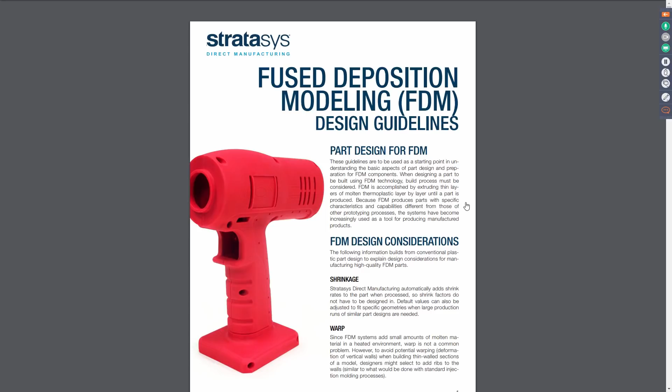Some basic general guidelines - we might offer more details as the challenge progresses, but this is a good starting point. Back to the landing page here, we also have a design guideline for those interested in designing parts for the ULTEM 1010 plastic material. This design guideline is provided by Stratasys, and it is not specific to ULTEM 1010. It's more general use case scenarios for FDM, but it does give you some good data. I will say right away, FDM ULTEM 1010 only prints in 0.010-inch slice height, and it has breakaway support.

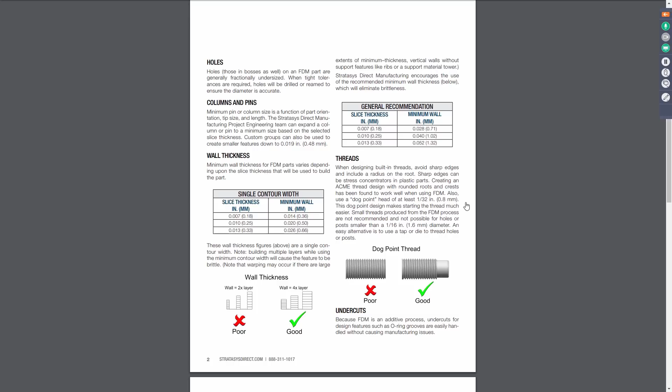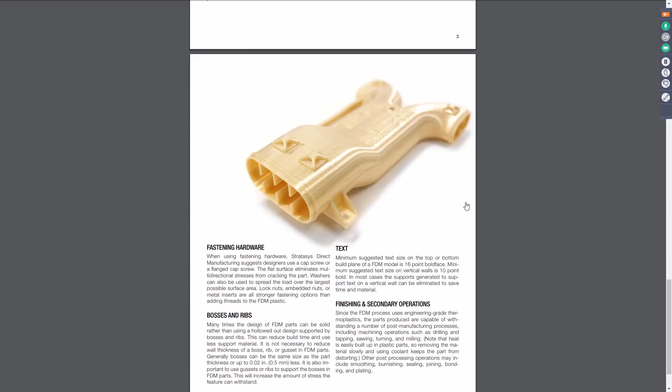FDM is a much older technology. There's a lot more info readily available on designing parts for FDM, so you should have no problem finding data, and you can always email me, treed@goengineer.com, if you have questions about that.

So the idea is that if you enter into the metal or the polymer category, the prize for the top 3 entries to each category is actually having your part printed and delivered to you. This is awesome - it's the most exciting thing about this challenge in my mind, and that is desktop metal - you can't get a part right now. This is the first time that the public has actually had a chance to design for the desktop metal system, and it's their first opportunity to really get a part in their hands, and that's really exciting.

Now, the grand prize, sponsored by Solid Thinking, is a 1-year license to Inspire Structures, and there are 3 Inspire plugins: motion, stamping, and casting. So as you start to use Inspire Unlimited and get hooked, you're going to have a chance to win a 1-year license, which is awesome. And I'm so happy that Solid Thinking was willing to front that.

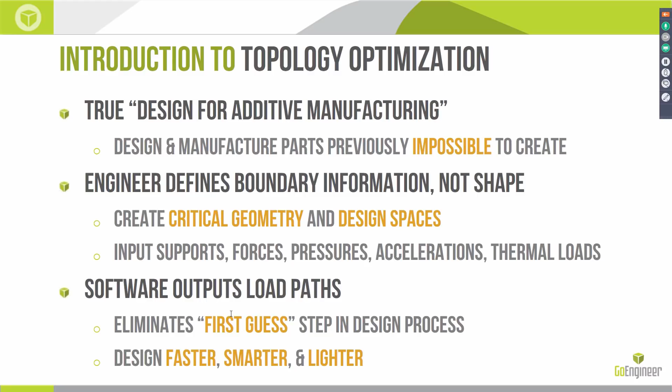And then these kind of nature-inspired algorithms whittle down the shape. They're showing you the load paths and eliminating that first guess that all designers and engineers have to take when they're confronted with a design question. And by eliminating that first guess and setting us down the correct path from the get-go, our design process is faster, it's smarter, we end up with lighter parts, or we end up with stronger parts for the same weight. Inspire specifically allows us to optimize our shapes for different characteristics.

We can optimize for the stiffest shape possible. We can target a certain mass. We can avoid resonant frequencies, and we can also target for wall thickness.

Another unique thing for Inspire is that we can create shape controls that allow us to not only use these topology optimization algorithms for 3D printing, which tend to deliver very organic shapes, but we can also guide our results to something that is usable for machining or casting or molding.

That's one of the best things about Inspire in my mind, and one of the roadblocks to using topology optimization in the past is that we would end up with shapes that weren't manufacturable. That's changing a little bit as 3D printing becomes more of a reality, but as it stands right now, most production parts are still being machined or cast or molded. And topology optimization in Inspire is going to still be applicable there.

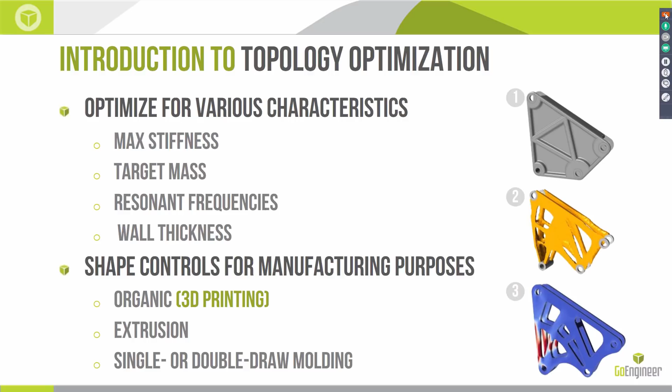Excellent. So after you've signed up for the design challenge, you'll be headed to the Solid Thinking Inspire Unlimited website. This is our main landing page for this. One of the things I want to point out right away is this resource section.

So immediately, if you want to get some training, click on Inspire Training. That's going to take you directly to a self-paced training program so you can walk through with the Inspire Unlimited platform. Once you've signed up, you'll get to this login page.

The reason you sign up again is we have it set up so you can actually just use your social media profiles to directly connect with Inspire Unlimited. So, for example, I can just use LinkedIn, and it's going to recognize me and open up Inspire Unlimited. If you don't have a social media profile, just fill out your email, and you'll get an email verification. Just accept that, and it will set up an account for you on Inspire Unlimited.

Now, once you're in the Inspire Unlimited platform, there's really two modes for Inspire Unlimited. The first is what we call viewing mode, where you're essentially just looking at models. And then the second mode would be actually editing mode, where you're creating and modifying designs.

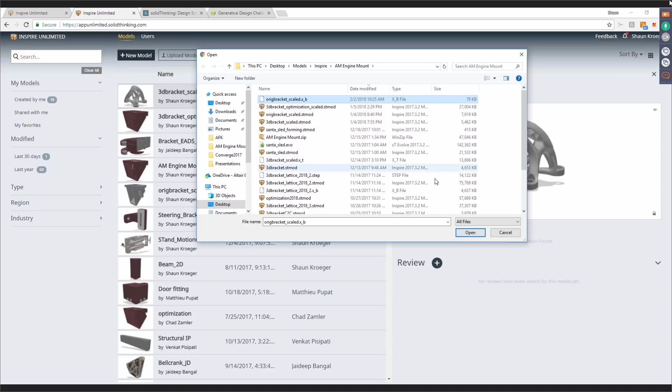So similar to the topology optimization workflow that you see in the desktop version, you can either start with a brand new model, so you want to start from scratch, or you can upload an existing design. So for example, say I want to just upload a Parasolid file. That's going to be processed in Inspire, and it'll tell me when that model is ready to view.

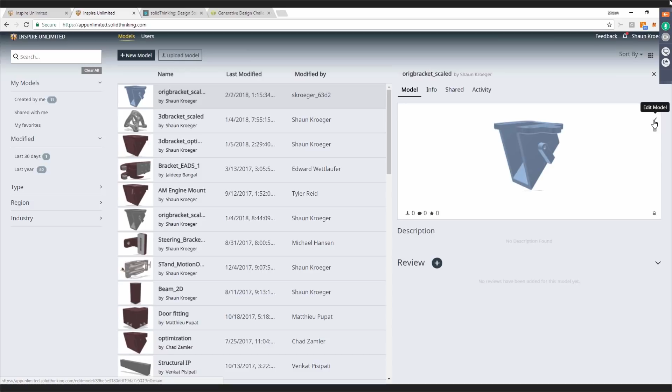And here I can see, okay, I just uploaded this bracket. And from here, you'll notice in the right-hand side, you can view that model, edit that model, or delete that model. So say you want to edit that, you're going to actually launch a full version of Inspire on the cloud. So here we can see that model is opened up inside of Inspire.

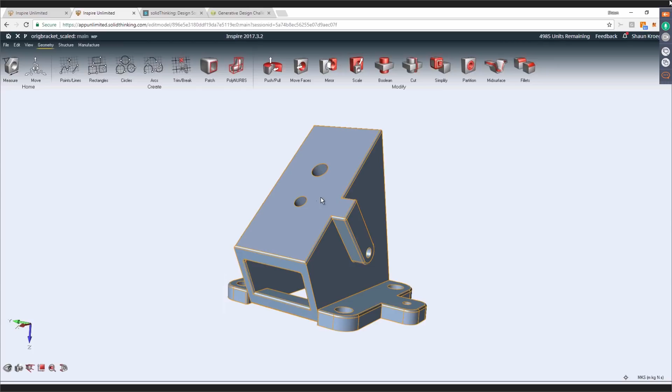The same mouse controls allow me to move things as I would on the desktop version. And I can use all the tools inside of Inspire to create things like packaging spaces. Say I want to simplify fillets, for example. Very easy to come in and directly inside of the interface, start simplifying your geometry to make it more suitable, give it more boundaries so that you can come up with a new optimized design.

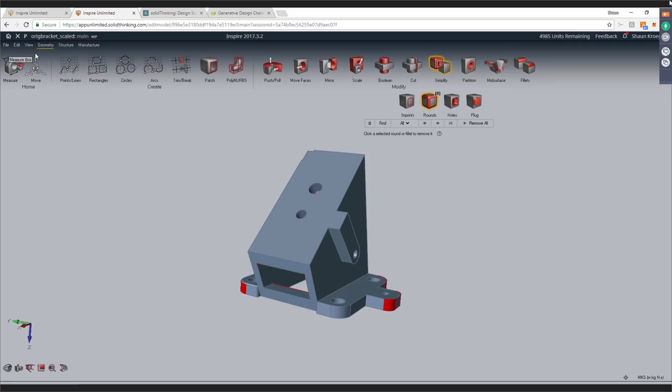I've already got one set up here, so I'm going to go ahead and leave this editing session and just open the one that I've already configured here, so you can kind of see what it looks like in the Inspire Unlimited interface.

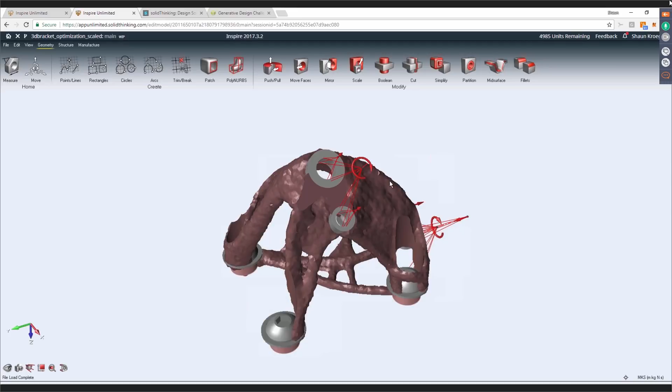Now, you'll notice this splash screen comes up, and normally it loads fairly quickly. If for some reason it's taking a long time, just be patient, as sometimes we have to spin up a new instance. So it could take up to 12 minutes to actually launch that editing session if you happen to be the person that comes on and enters and creates a new instance.

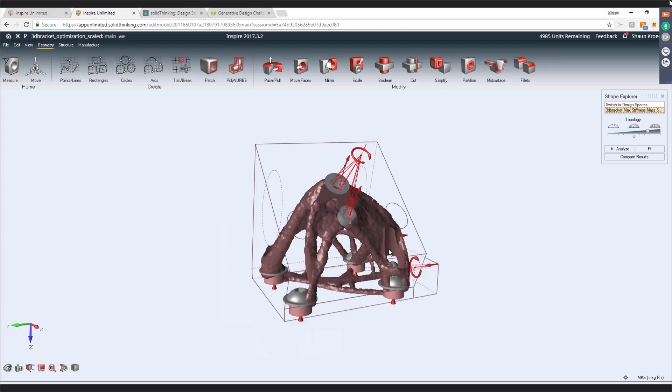So here I've taken the original bracket design, expanded that volume, and let Inspire use the loads and the forces that this bracket's going to see to create an optimized shape. And so from this shape, you can directly start creating geometry using things like PolyNURBS to simply wrap the geometry with smooth organic shapes.

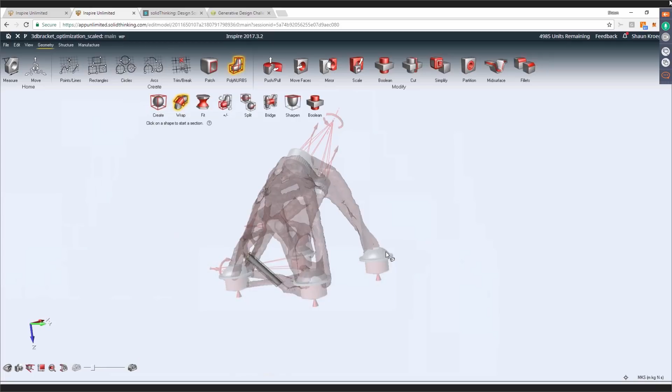Now, once you're happy with your design and you're ready to submit that to the judging panel, I want to point out here, you'll notice up at the top, I've got my account information.

So if I go to my account, go ahead and leave my editing session, and we've set up a team, right? So we've got the GoEngineer Generative Design Challenge team. And once you've logged into Inspire Unlimited, you'll be added to this team. And you can then, with that, share any of your models once you're ready.

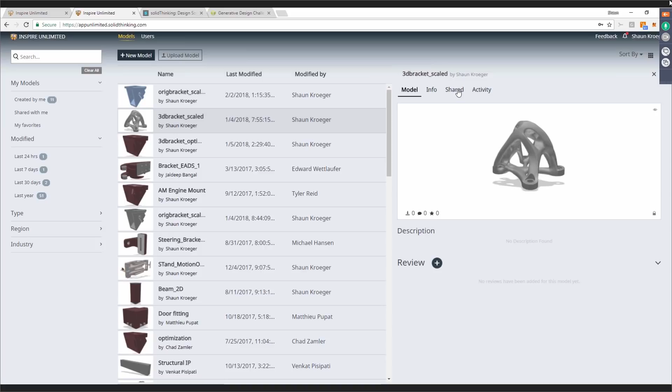So, say I wanted to take this final bracket design that I've created here and share that, you can come in and just share by user.

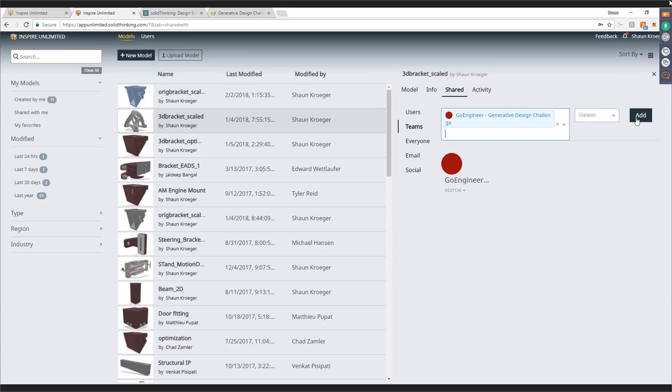So I could share this, say, with Tyler, and I can make Tyler either a viewer, an editor, or an owner. For final judging, you want to make Tyler, myself, and Megan an editor so that we can actually download and look at the model in detail. If you want to just let other people look at your design without being able to change it at all, you could share it with the whole team. So you could say, I want to share this with the GoEngineer Generative Design Challenge team, and let them view it. This adds permissions to your designs to let others look at it.

Also, if you want to ask questions, you can always use the Inspire Unlimited platform to provide feedback. This feedback is going to send your questions directly to the Inspire Unlimited development team.

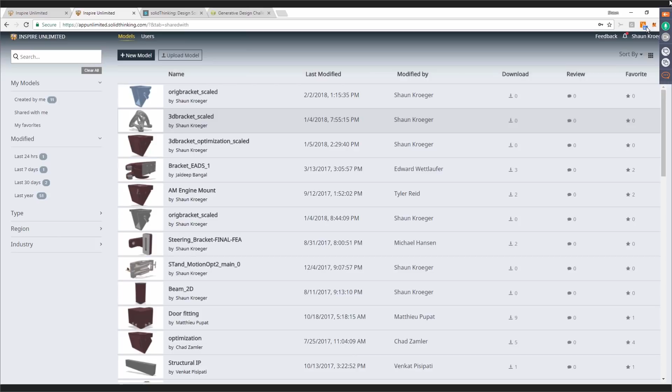Or you can use messaging capabilities in here as well. So if I come back to messages, for example, I can send a message directly to Tyler: check my model out. And then that's going to go directly to Tyler. So this is also a platform that allows you to quickly collaborate, not only with the judges, but with others if you wanted to work together on a design.

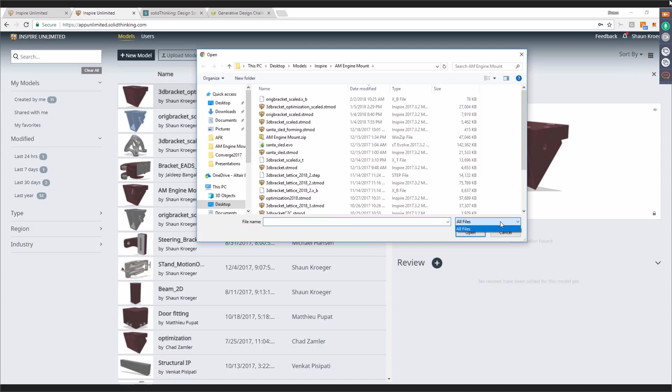As far as design or model types, when it comes to uploading models, Inspire supports all sorts of different file formats. If I look at the desktop version here and go to open a file, you can see that we support pretty much any type of design file from ACIS, CATIA V4 and V5, IGES, Inventor, Parasolid, SOLIDWORKS, STEP, STL. Any of these model types can also be uploaded to Inspire Unlimited.

The last thing I'll leave you with is that if for some reason you've got poor internet connection or you're unable to use the Inspire Unlimited platform, you are welcome to also use a free trial version of Inspire to set up and run your model, and then just upload your final model when you're ready to submit it to the judges. So if you go to request a trial under downloads, you can fill in and select Inspire from the drop down, and we'll send you a license file for you to run a full desktop version of Inspire on your local computer. So that is an option if you're unable to leverage the cloud platform.

So with that, I'm going to pass it back over to Tyler to talk a little more about the printing technology being used. Awesome, thanks Shaun.

So just to reiterate to you guys, that wasn't meant to be a comprehensive look at Inspire. The tutorial that Shaun linked to is going to be a great place to start. It's going to get you guys familiar with some of the CAD capabilities of Inspire, and then also how to set up load conditions and run optimization, and also play with the polyNURBS tool. We are going to be talking about some more specific workflows you might have, say if you want to redesign an existing part, or if you want to start some basic shapes in SOLIDWORKS or another CAD tool and then import those shapes into Inspire for optimization. We're going to help you guys do that as well.

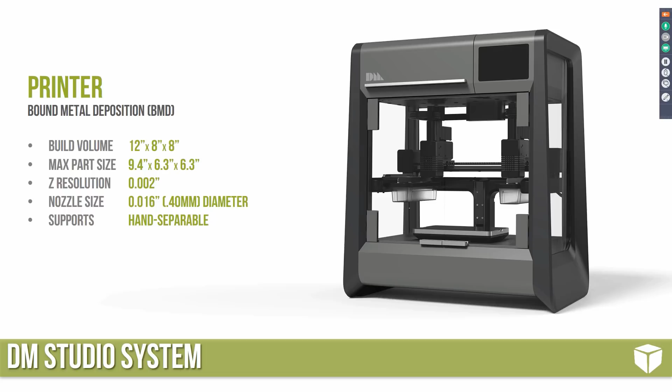Thank you, Tyler. So here we have the Desktop Metal Studio printer. This printer utilizes a technology called BMD, or bound metal deposition. This technology is similar to FDM in that it is a deposition process 3D printing, and it also utilizes MIM technology. So similar to FDM, where you have a spool of plastic filament that's being extruded and printing a part layer by layer, we have a very similar process, except instead of the spool, we're using a rod, and that rod is made of powdered metal mixed with polymer and wax binders, which is then extruded onto the build platform.

And later, there's another slide where we actually talk about the other steps in the process, but it is later consolidated into a printed metal part. So the build volume is 12 by 8 by 8 inches, but you can see that the maximum part size is a bit smaller than that. That's because we are printing with these binders, and when these binders are removed and the part sinters down, we lose some of the overall volume of the part. So we scale the parts up about 20% to compensate for that loss.

The Z height, the smallest resolution we can do, is 2/1000 of an inch, or 50 micron layers, utilizing a 16/1000 of an inch, or 0.4 millimeter diameter nozzle. And perhaps one of the most interesting things about the Studio system, aside from the ease of use and the office-friendly capabilities, is the patented ceramic interface layer, which allows us to have hand separable supports. So what that means is we're printing our support structures out of metal.

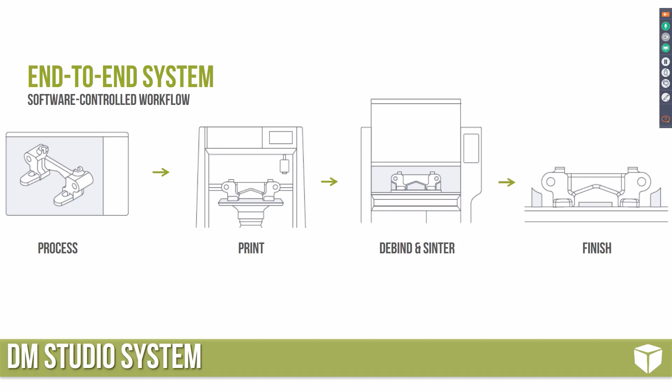Correct. Awesome. So the material that we're going to be using for this competition is the 17-4 PH stainless steel. This is a precipitation hardening steel commonly used by aerospace, petroleum, chemical, and food processing industries. Its hardness and corrosion resistance makes it ideal for jigs and fixtures, brackets, as well as production parts, including gears, valves, and pump shafts.

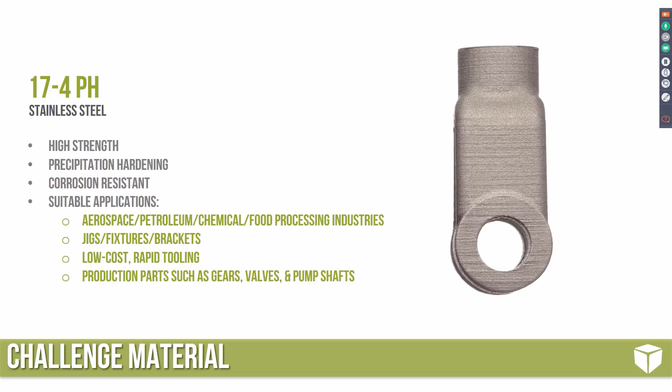Awesome. So I'm going to do a quick overview of the Fortus series machines. We just got a brand new Fortus 450mc in our Salt Lake City office. It uses fused deposition modeling, meaning engineering grade thermoplastic materials.

The build volume is a little bit larger, so if the specific design process that you're trying to solve with this challenge doesn't fit in the envelope of the DM Studio system, then you might choose to use a high-performance plastic instead. The plastic that we are printing in is called Ultem 1010.

It's the flagship material from Stratasys. It prints in only one Z resolution, that's 10/1000ths of an inch. This machine is capable of printing as fine as 5/1000ths of an inch, and as coarse as 13/1000ths of an inch.

It also, in general, creates support material out of water-soluble support or breakaway support, but specifically the material that we're using in this challenge, because it is the highest performing material, it is only breakaway support. So something to think about when you're submitting your designs.

Ultem 1010 is known for having the highest strength and stiffness in the FDM world. It is the most temperature resistant material offered in the FDM world. It is FAA certifiable for flight and food safe. We hear about production parts ending up on Boeing and Airbus aircraft. These are typically made out of this material.

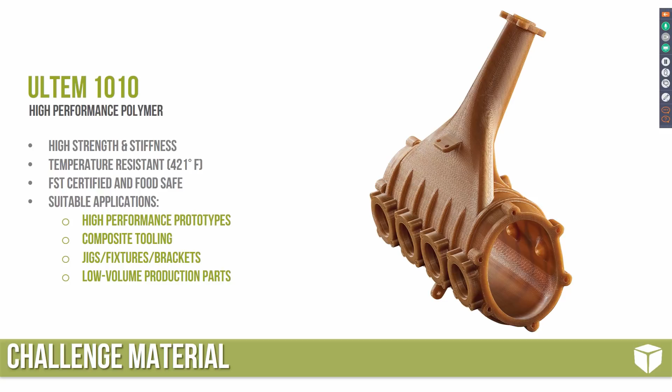Some suitable applications would be very high performing prototypes, composite tooling and other low cost rapid tooling, jigs and fixtures and brackets, and also low volume production parts. You can see the complexity of that part is pretty high, and those are the types of things we're hoping to see out of this challenge.